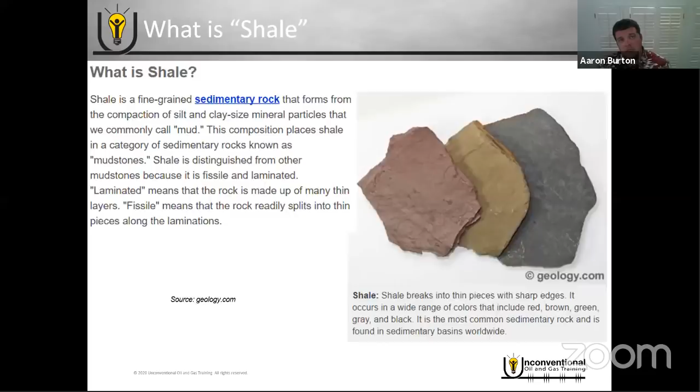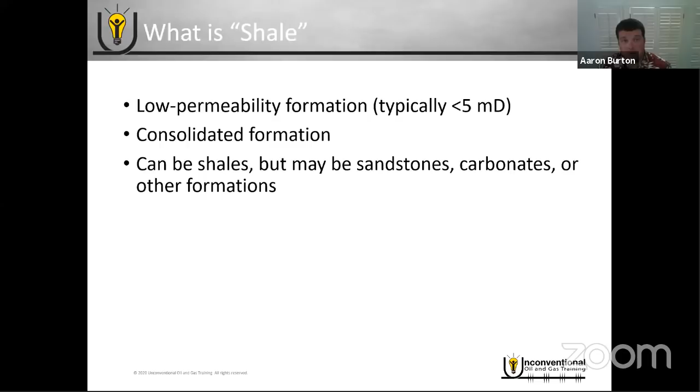But shale itself has become a slang terminology for these unconventional type plays. So with these unconventional type plays, what people are referring to when they say shale plays, they're talking about a low permeability formation that is typically less than 5 millidarcies if you're talking about oil, and typically less than 0.05 millidarcies if you're talking about natural gas. It's a consolidated formation, so it doesn't require any sand control. It's typically a relatively stable formation, and it can be shales, but it can also be sandstones, carbonates, dolomites, and any other type of rock as well. So it's just any type of rock that has that low permeability and can't produce on its own. At the end of the day, it's a reservoir that requires multi-stage hydraulic fracturing to produce at economical rates.

So the name of the game in these types of plays is to increase your reservoir contact area. The first way to do that is horizontal wells. So what we're looking at here, we've got our target reservoir, and it really depends on where you're at in the world as to how thick this reservoir may be.

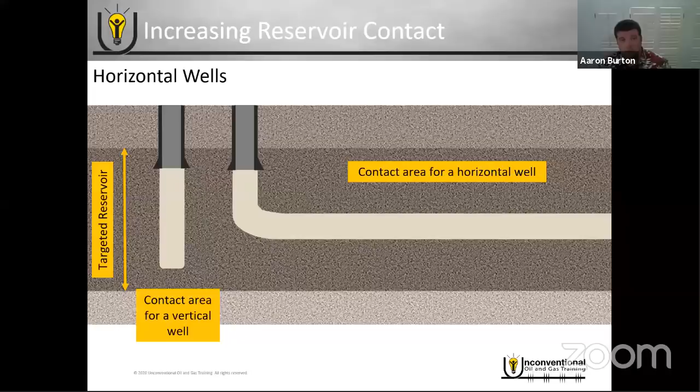If you're looking at the US and Canada specifically, typically you're not going to get much thicker than about 500 feet, and they can be as thin as about 50 feet. So let's just assume that 500 feet thickness. You can technically put a vertical well in there and get access to that 500 feet. But what if you put a horizontal well in there and then took it out 5 to 10,000 feet? Now you really significantly increase the contact area for that reservoir.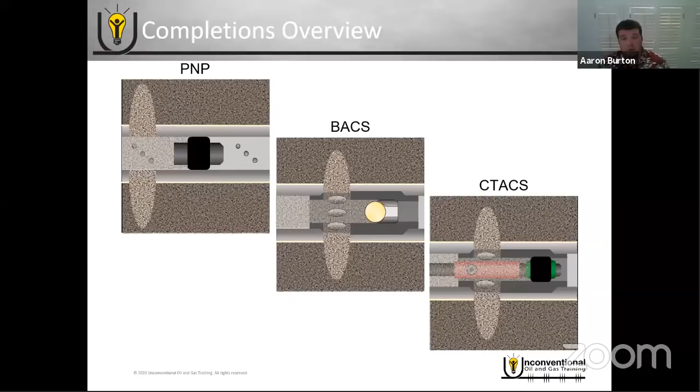Before we get too far into this, I want to familiarize you with some nomenclature, since I'll use this terminology frequently throughout the presentation. A horizontal well is just like looking at a foot. Right at the curve of the well, that's the heel. Then at the end of the well, at total drilling depth, that's the toe of the well. So just imagine a foot: the bend is the heel, the end is the toe.

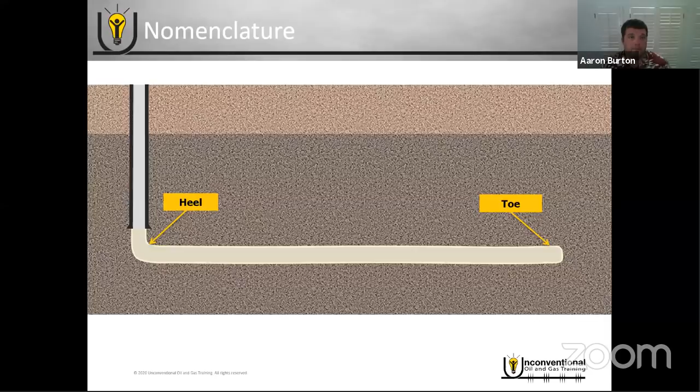So, plug and perf. Plug and perf is the original completion system that unlocked these types of reservoirs and is still the most commonly used today. We have our horizontal well drilled in our target reservoir. We use the drilling rig to run our casing into the well, and that casing is just steel pipe connected together and run as a string. Once you get to the intended depth, you pump cement through the casing into the annulus. Then once you're finished cementing, you do your pressure testing and move your drilling rig off location.

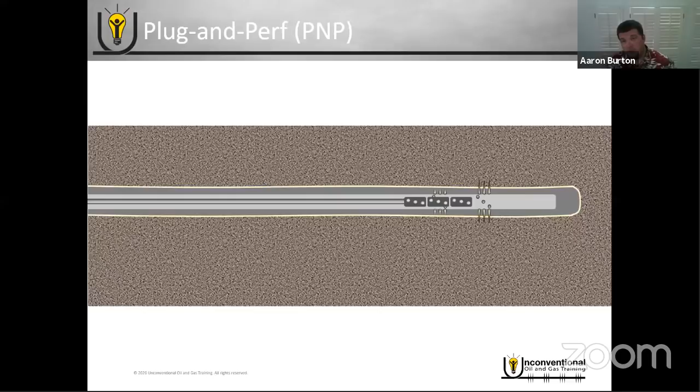Once you're ready to begin fracturing, you bring out your pressure pumping crew and your wireline crew. In this case, we've cemented ourselves into place, so because we have cement here at the toe of the well, we no longer have the ability to pump into this well. So we have through tubing intervention: we bring out a workover rig or a coil tubing rig, push down perforation guns, and fire them at the toe of the well. Those perforation guns penetrate through the casing and cement, and re-access the target reservoir. Once finished, we pull out of hole, and then begin fracturing our first stage.

Now, an alternative to this through tubing run is to replace those perforations with a cementable pressure-activated frac sleeve. You see these interventionless techniques being used more and more commonly, just to avoid that through tubing intervention run. You would run the sleeve, make it up directly to the casing with the drilling rig, run it into the well, and cement it into place with the casing. Then when you're ready to begin fracturing, you simply pressure up, and once you apply the right amount of pressure, the sleeve shifts open and you begin fracturing.

These sleeves are also commonly referred to as toe sleeves. So if you hear someone refer to a toe sleeve, that's what they're talking about.

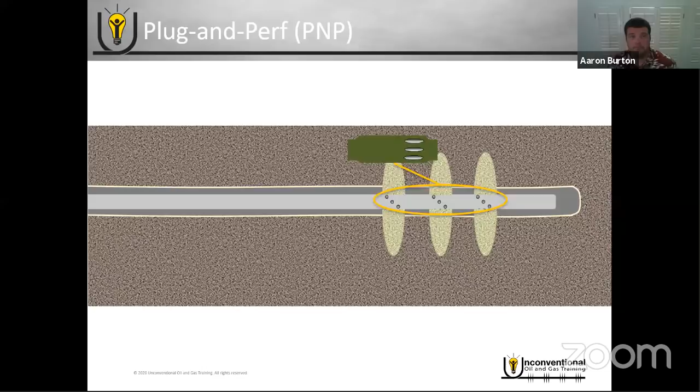Once we finish fracturing our first stage, most operators go to a wireline deployed system, because now you have the ability to pump through that previously fractured stage and pump down a wireline assembly. That wireline assembly will include, of course, wireline. At the toe of the assembly, you would have your frac plug. Above that, you have your setting tool, which will set the frac plug and then release from it. And above that, you have your perforating guns.

Once you get to the intended depth, an electric signal is sent down the wireline to set your frac plug. Once the frac plug is set, your setting tool releases, then you pull up the wellbore to the depth of your first perforation.

Once you reach that depth, another electric signal fires your first set of perforation guns. Then you pull up hole to the depth of your second perforation, and another electric signal fires your second set of perforation guns. Then you pull up hole to the depth of your third perforation, and another signal fires your third set of perforation guns.

Remember, this is important, especially for anyone taking the quiz: all of your wireline assembly tools are activated with electric charges through the wireline.

This technique is called cluster perforating. In this example, we had 3 individual guns and fired 3 individual clusters of perforations. So the nomenclature here is 3 clusters per stage in this well design.

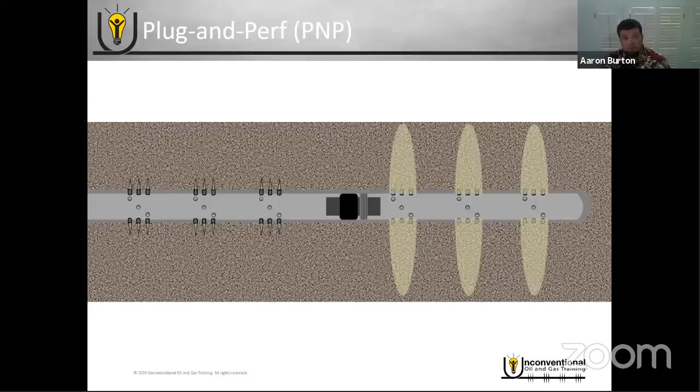Once we finish perforating, we pull out of hole with the wireline. Once we get back to surface, we set back up our frac crew and begin fracturing the second stage.

After that, the process repeats until you've fractured all stages in the well. You shut down your frac job, run in your wireline, set your frac plug to isolate from the second stage, perforate above that for your third stage, then pull out of hole with your wireline and begin fracturing your third stage. Then you run wireline again, set your plug, perforate, and fracture your fourth stage.

Pulling out of hole with wireline has always really been the weak spot of plug and perf, because that additional wireline run between stages is non-productive time for your frac crew.

Once you're finished fracturing all the stages in the well, if this is a traditional plug and perf using composite plugs, you have to enter the well again with coil tubing or a workover rig to mill out the plugs. Once the plugs are milled out, you can put the well on production.

This isn't as common, but it is used occasionally in certain applications: you can also do open hole plug and perf. What we looked at before used cement to isolate the annulus, but it's also possible to run open hole packers on the...

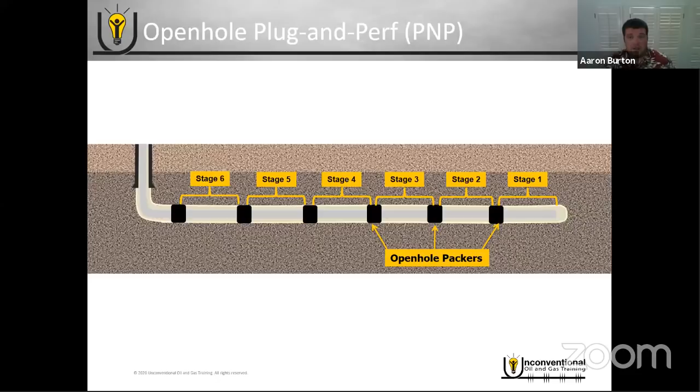It is possible to run open hole packers spaced out on the casing, and that'll be your annular isolation between each stage. Overall, the frac job looks the same, except now you have to be sure that you land your plug and your perforations between your open hole packers, because that's what determines your stage spacing and the overall length of your stage.

Again, it's not very common to set up plug and perf this way, but in certain applications, you can set it up this way if needed.

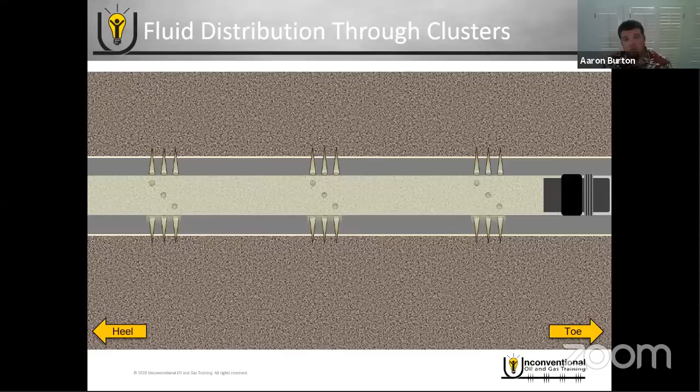Now let's look back at fracturing through the clusters. The basic theory of hydraulic fracturing assumes we get even distribution through the clusters. So if you're pumping 90 barrels a minute through 3 clusters, your frac design is 30 barrels a minute per cluster. The reality is we know we don't get even distribution through the clusters.

First and foremost, you have friction between the perforations to consider as well. Looking at it from that perspective, the path of least resistance is the heel-most perforation, and the path of most resistance is the toe-most perforation. So we're going to have more fluid distribution through the heel cluster than the toe cluster.

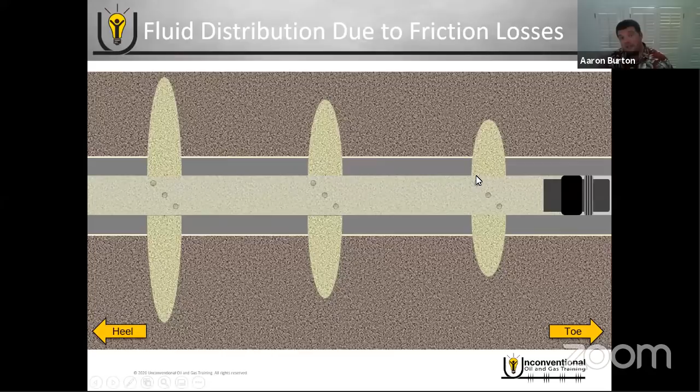That's where a technique called limited entry perforating comes into play. This is a very simple example—there are many different ways to do limited entry perforating, but this is an easy visual to help you understand the concept.

Now we've changed the flow diameter of each perforation: the toe-most perforation has 5 holes, the middle has 4, and the heel-most perforation has 3 holes. So from a flow area standpoint, the toe is easiest for the fluid to exit, and the heel-most perforation is the most difficult.

What you want to try to do is balance out the amount of energy, setting it up so each perforation cluster requires the same amount of energy for fluid to flow out. Hopefully, if you do your limited entry perforating correctly, you go back to that even fluid distribution throughout the clusters.

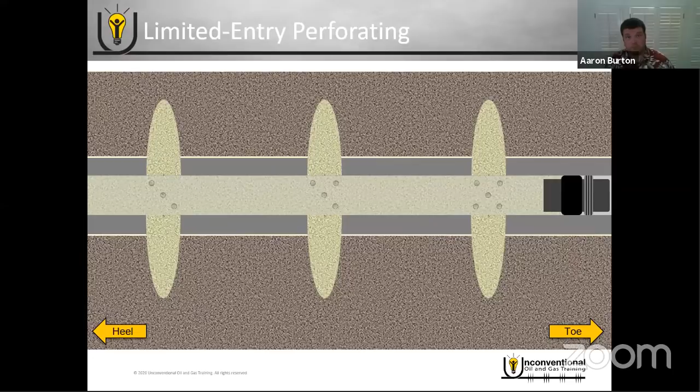If you're looking at friction as an example, that's something we have a little bit of control over, but we don't have control over the heterogeneity of these formations. So let's go to a 6 cluster per stage example here, and look at what happens when our fluid distribution looks something like this, just because of the different weak spots in the rock.

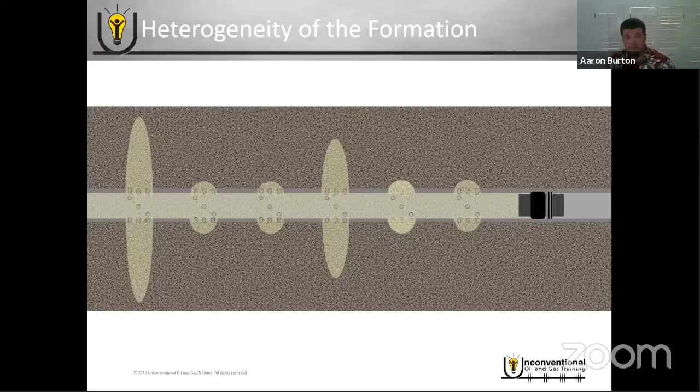That's where it gets a little bit tricky, and that's where something called diverters come into play. These are near wellbore diverters. If you go through a lot of US operator investor reports, a lot of times when operators talk about adding more clusters per stage, they often reference diverters as well.

So diverters, once again, are a little bit tricky. This is a very simplistic example just giving you the idea of what you're trying to do with diverters. The simplest way to visualize it is you assume all of your fluid flow goes out of one perforation. So you consider that single cluster of perforations an individual stage, and you pump as much fluid and proppant as you want out of that particular cluster.

Once you've pumped that, you pump enough diverter down to block off the near wellbore for that cluster, and it forces the fluid to divert into another set of perforations. You pump as much fluid and proppant as you want in that particular cluster, and then once you're finished, you pump another diverter to block off near wellbore there and force the fluid to divert to another cluster.

And then you just repeat that process. You would pump however much fluid and proppant volume per cluster that you want, followed by a diverter, until you've finished fracturing that stage.

Now, the diverters are a couple of different types of materials. Some of them you would have to go in with through tubing intervention to mill them out or circulate them out. And some of them are disintegrating material that will remove themselves from the well, and you can produce after your clean out run.

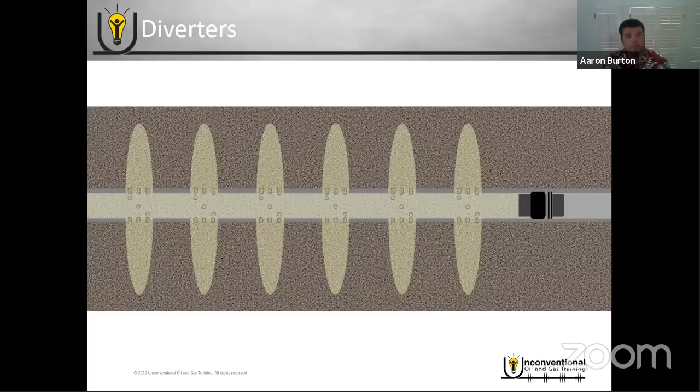But let's go back to this example here. Once again, we looked at a very simple example where we assumed all the fluid and proppant was going out of one cluster. But what happens in this case right here where that's not the case? So how do you possibly do a diverter strategy here?

So you pump enough diverter to block off one set of clusters. Well, now it's blocked off one dominant perforation, but there's another dominant perforation. So now does this perforation cluster become even more dominant? And then what happens if the diverter blocks off a non-dominant stage here? Now it's actually doing the opposite of what it's supposed to be doing.

You also have to be careful with your diverter design. If you pump too much, then you're blocking off all perforations, and you've created a situation where you've screened out, and now you're going to need through tubing intervention to recover this well and resume your frac job.

So diverters right now, we've learned a lot. We're making constant improvements, but overall they're as much an art as they are a science. This article right here from the SPE magazine, JPT, is a very good article outlining 5 case histories with a variety of different results with diverters. It gives you a good idea of some of the successes and some of the failures with diverters, and just how difficult they really are to get an effective diverter strategy.

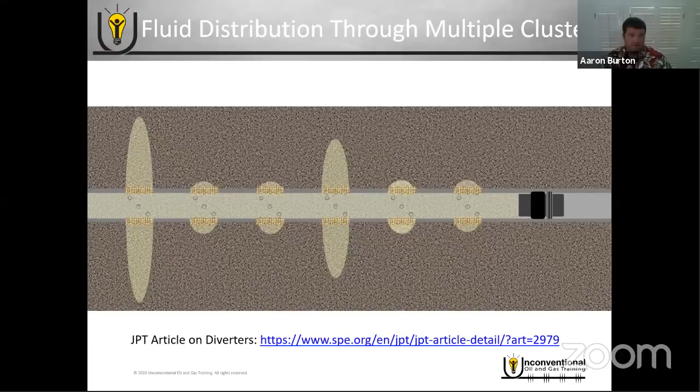Now, one of the things you're seeing with diverters right now is that operators are using them to eliminate a few stages from the wellbore. So what they can do, this image we're looking at here, this is 2 individual stages with 3 clusters per stage. They could take that same design and make it 6 clusters per stage, and they still have the same stage spacing, the same number of holes and flow area in that stage.

They may set it up to where they pump half of their frac fluid, assuming it goes out of half of the perforations, and then they pump enough diverter to block off half the perforations, and then they pump the remainder of their frac job.

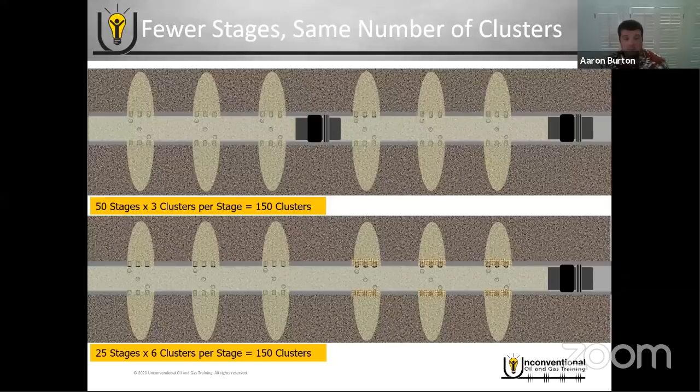Now if you look at these two setups, if you're wanting 150 clusters, 150 injection points, in the top scenario you could use 50 stages with 3 clusters per stage to get that 150. In the bottom one, you would have 25 stages with 6 clusters per stage and still have the same 150 spaced out the same way.

Now in the bottom scenario, you have half the plugs, so half the plug cost, half the plug deployment time, which is that wireline run between stages. So there can be significant savings in non-productive time, and you're also going to have savings on the mill out time as well because you have half the plugs to mill out.

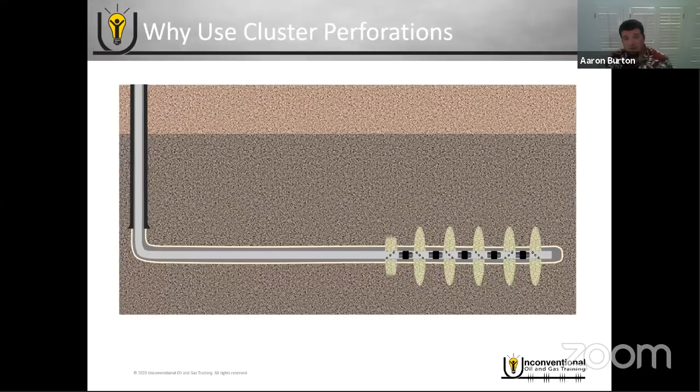So with the complications of cluster perforating, why do we use it in the first place? Technically we can do single entry plug and perf. You go in, fire a single set of perforations, fracture, set a plug, another single set of perforations and fracture, and just repeat that process, only fracturing one cluster per stage. But the reason we don't do this is because that would be extremely inefficient. So we do cluster perforating for efficiency purposes.

So this is an example from a prominent Permian operator, from their Q1 2016 operator investor report. In that report, they mentioned they were using 9,000 foot laterals, 100 feet per stage with 15-foot cluster spacing. Just a quick reminder on the nomenclature: the 100-foot stage spacing means there's 100 feet between each plug in the wellbore, and the 15-foot cluster spacing would be 15 feet between each perforation within that stage.

So what that data translates into: they were running 90 stages per well with 6 clusters per stage, for a total of 540 clusters of perforations in that well, 540 total injection points. If we assume 2 hours of downtime between stages to run our wireline, set our plug, perforate, and pull out of hole, then with 90 stages that's 7.5 days of downtime, assuming 24-hour crews. If we tried to break that into 540 stages, that would be 45 days of downtime alone. So it's extremely inefficient to break it into individual stages when you're looking at this many injection points.

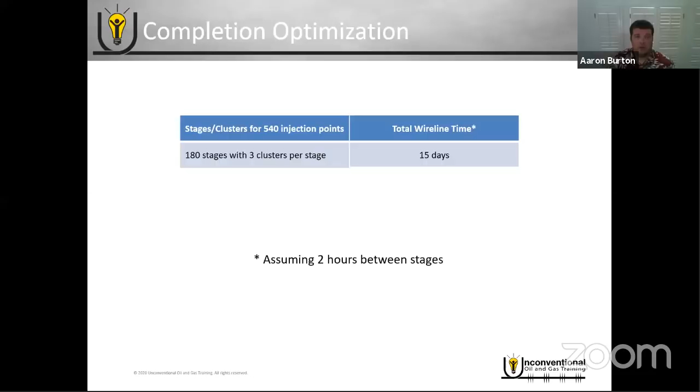So let's stick with that 540 injection point example. There are many ways to set it up. You could do 180 stages with 3 clusters per stage, and assuming 2 hours between stages, that'd be 15 days of wireline downtime on your pressure pumping crew. You could do 90 stages with 6 clusters per stage, that would be 7.5 days of downtime. Or you could do 45 stages with 12 clusters per stage, and that would be 3.75 days of downtime. So you're looking at a very significant amount of time and money savings by going with more clusters per stage. Not to mention, in the top scenario you have 180 plugs you have to run, 90 plugs in the middle scenario, and 45 in the bottom scenario. So as far as plug upfront costs, there can be significant savings there as well.

Now, everything we've talked about with the inefficiencies of wireline runs is talking about a one-off well. So what most operators have done, especially in the US and Canada, is go into pad drilling mode, allowing them to run simultaneous fracturing operations. They start pad drilling, drilling these wells really close together at surface, so the wellheads may only be 10, 15, maybe even 20 feet apart. That allows you to set up your wireline and pressure pumping close enough between the wellheads that you don't actually have to move them.

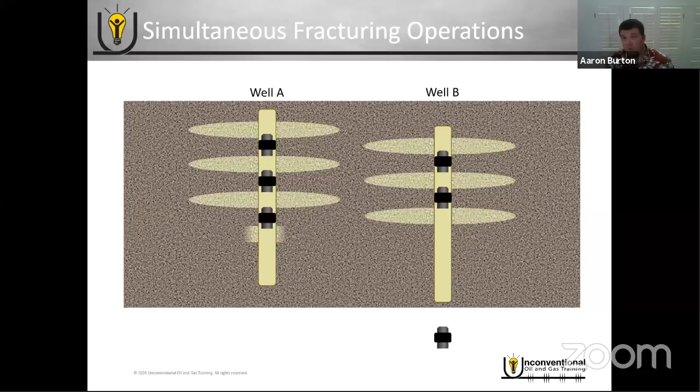You never have to actually move your frac crew or your wireline truck. You set up your frac crew with a manifold where it's simply turning a valve to control which fluid or which well the fluid is going into. And with your wireline, you set up your crane where it can swing between the two wellheads without ever being moved. This allows you to start eliminating downtime and be more efficient with plug and perf operations. It's called simultaneous fracturing operations, but it's also very commonly called zipper fracturing.

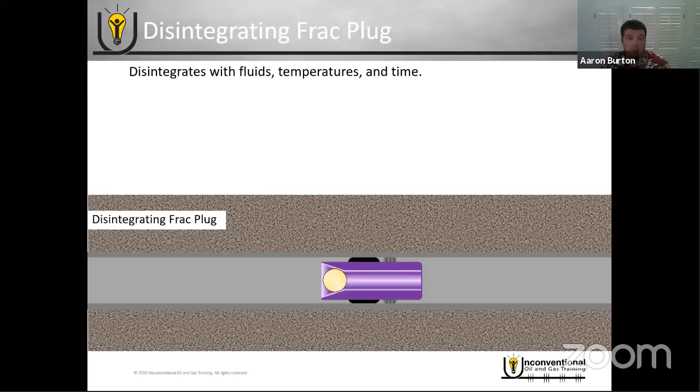One of the newer technologies with plug and perf is the disintegrating frac plug. The concept is that you don't have to have the mill out afterwards. You go in, it's just like a standard plug, the ball isolated plug. Once you set the plug, you pump the ball down hole, and that's what gives you your isolation. You fracture against the plug. Once you're finished fracturing, over time with the wellbore fluids, the ball and the plug will disintegrate and leave you with a full diameter. That helps eliminate the mill out afterwards. You don't have to go in with coil tubing or a workover rig. It makes it interventionless after the frac job, and it leaves you with a full production diameter.

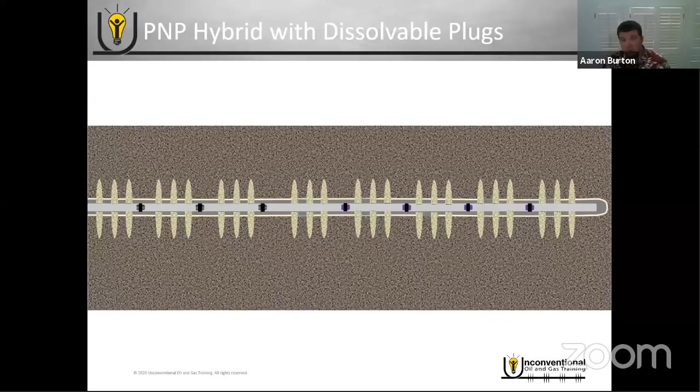There are a couple of different things to consider with dissolvable plugs, including price and application. Right now, you're not seeing a lot of full wellbores with dissolvable plugs, with the exception of a couple of examples like the Haynesville in the US. But what you are seeing is a hybrid system in some longer laterals, where they'll run the dissolvable plugs at the toe of the well and traditional composite plugs above that. That way they can have an interventionless system at the toe of the well, and their composite plugs within the operation range of coil tubing, with the interventionless dissolvable plug outside of that range. So they can go in, mill out the composite plugs with coil tubing, and over time the dissolvable plugs remove themselves from the well, and they don't have to worry about extending that coil tubing beyond the distance where they consider it safe to do so.

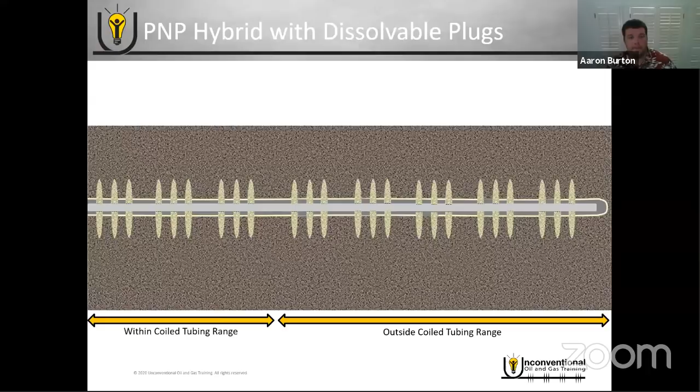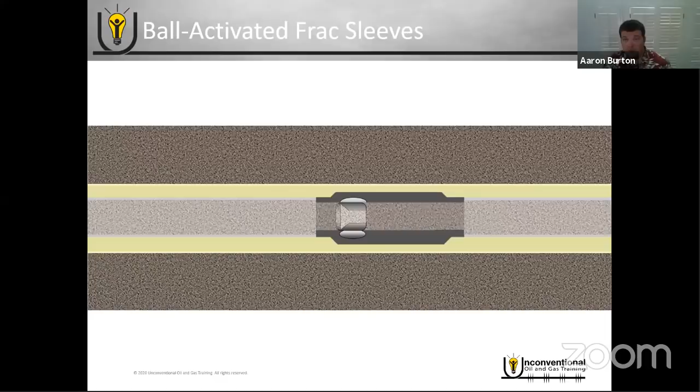If we zoom into the second sleeve, overall these sleeves are a very simple design, at least from a conceptual standpoint. You have ports on the outside of the sleeve, and if we look at the cutout on the inside, there's an insert covering those ports with a ball seat profile in it. As you're fracturing your first stage, you're pumping through all of the ball seats above that. As you finish fracturing your first stage, you pump a ball that corresponds to the second sleeve into the wellbore. It'll land on the seat, isolate from below, open those ports, and force the fluid to divert into the second stage.

Now if we move up hole of the third sleeve, as we finish fracturing our second stage, we drop the ball that corresponds to the third sleeve. It lands on the seat, shifts the sleeve open, and forces the fluid to divert out of the third sleeve. So it's a very efficient fracturing process because you're never actually having to shut down the frac job.

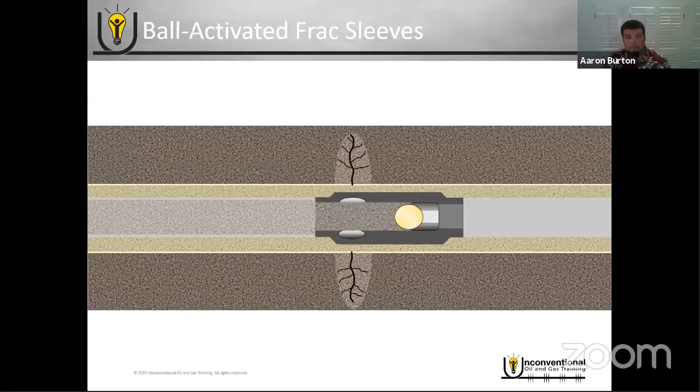It's a little difficult to tell in the animation, but the way you have selectivity with these balls and ball seats is the different sizes. Each size gets incrementally larger, so the smallest ball will be at the toe of the well and the largest ball will be at the heel. That way, the first stage can pass through all the sleeves above it and only open the sleeve that it's intended to.

After that, you're just repeating the process. You drop the ball that corresponds to the fourth sleeve, pump it down hole, it lands on the fourth sleeve, opens that sleeve, and begin fracturing. Then you pump the ball that corresponds to the fifth stage, and just repeat that process, dropping the balls in the correct order. That's really the highlight of this type of system—nonstop fracturing operations. You may have to slow down occasionally to drop the balls in the wellbore, but overall you're not having to run intervention between the stages. It's very efficient and very quick at surface.

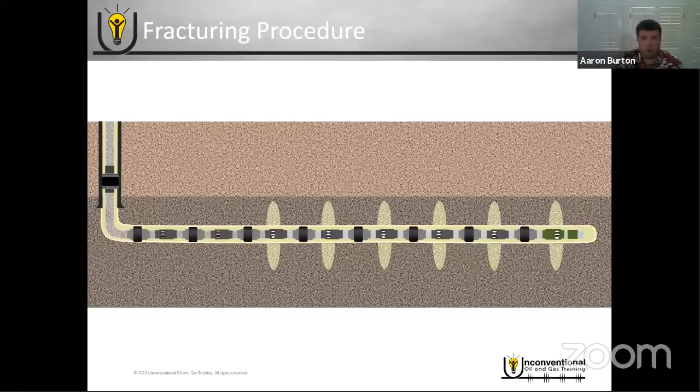If we look at the post-frac operations with this system, we're going to produce through the fractures we've created, back through the ports in those sleeves, and then production from below will push that ball off seat and back towards surface. In a lot of cases now, those are also dissolving balls. So instead of the balls having to return to surface to get out of the wellbore, they'll disintegrate within the wellbore fluids and remove themselves from the well without intervention. Now you can also see that there is a diameter restriction in the production because of those ball seats.

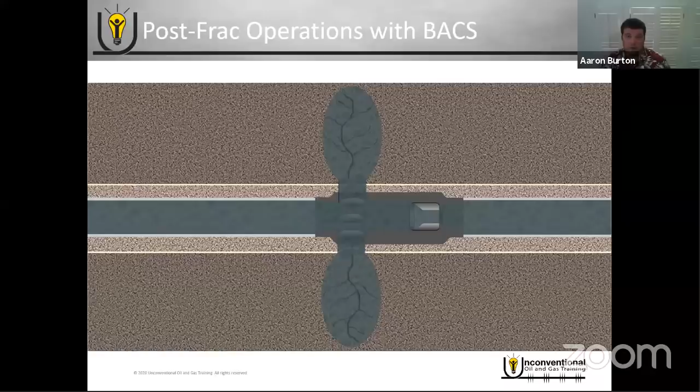These are designed, at least most of them, with cast iron. They're designed to be compact. So if that production diameter is an issue, then you can go in afterwards, mill out that ball seat, and get a near full wellbore production diameter.

Now, even though these were originally designed as open hole completions, they are also available as a cemented completion as well. So you can go in, the overall setup looks the same as far as the frac job. The only real difference with them is that instead of having packers between each sleeve for isolation, now you have that cement. Other than that, when you get to the fracturing process, you're just going to drop the balls in the correct order, and the frac job itself looks exactly the same.

There are also multi-entry ball activated frac sleeves. These are really designed to mimic plug and perf, to mimic that multi-cluster option with plug and perf. So very similar overall with the frac sleeve, with a couple of different nuances. First and foremost, we have adjustable frac ports, once again trying to look like plug and perf with the multiple clusters. In this case, you can blank out some of the ports if you don't want that much flow area, which allows you to do limited entry techniques. You can also change the size so you can have a larger or smaller diameter with those frac ports.

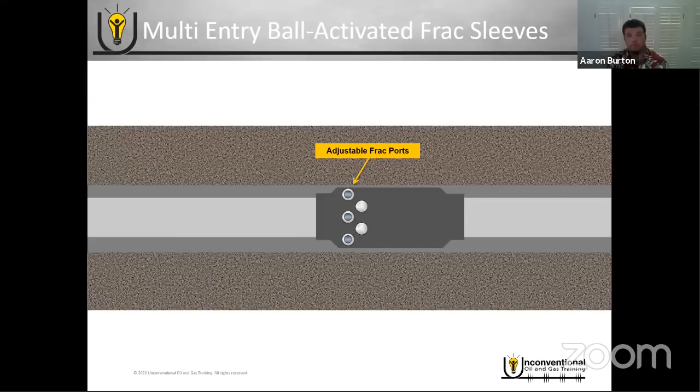Now, if we look at the cutout, once again, very similar. The only difference is now you've got that insert with the ball seat covering up the frac ports. When the sleeve shifts open, if it is one of the subsiding ball seats, then applying pressure shifts it down. That ball seat will subside out of the way, and the ball will continue moving down the wellbore so that it can open another sleeve in that same stage. We'll look at what I'm talking about here.

Once again, these are more used as a hybrid system in longer laterals with plug and perf. So you run your sleeves at the toe of the well, then you can drop the individual balls. The smallest ball at the toe will open all three of those sleeves at one time, and then you fracture through all three. Drop the next size ball, you fracture the next three, next size ball, fracture the next three. Now you can mimic plug and perf operations with frac sleeves, but you don't have to run wireline, and you also do not have to mill out afterwards. You can produce through those ball seats. Then once you get past that point, you do traditional plug and perf with composites.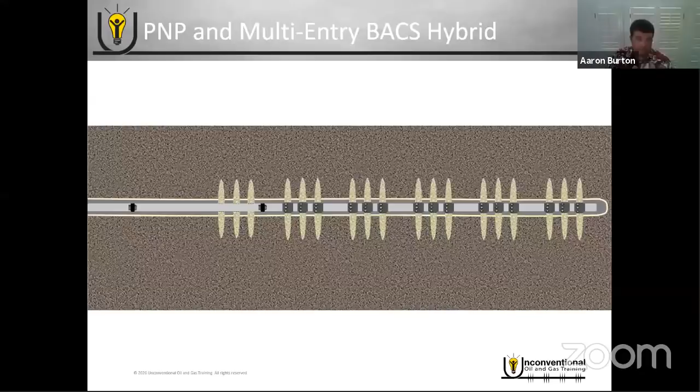Once you finish with the well, you would mill out your plugs and produce through your sleeves. It's the same concept as the hybrid we looked at before. You run plug and perf within the operating range of coil tubing, and the interventionless sleeves outside of the range of coil tubing.

So a couple of new technologies with these types of systems. We have the frac sleeves with counter mechanisms. With these sleeves, all of these ball seats are the same size, and you can see there's a counter. The toe sleeve is going to be sleeve 0. Once it passes through all the other sleeves until it gets to sleeve 0, you apply pressure, shift the sleeve open, and begin fracturing the first stage.

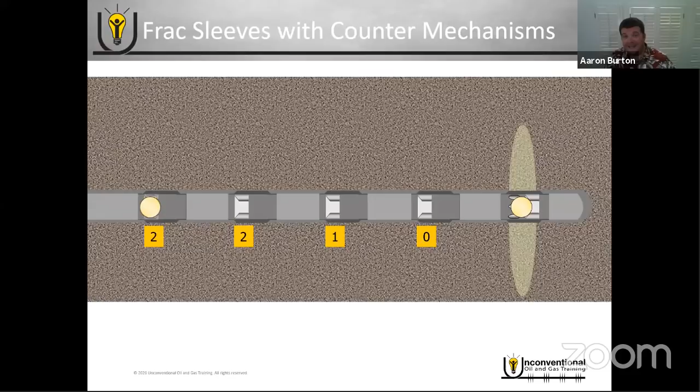Now you drop the exact same size ball again, pump it through all the seats, it'll count down, and now sleeve 0 is stage 2. It lands on sleeve 0, you apply pressure, shift that sleeve open, and begin fracturing your second stage. Then you drop the exact same size ball again, and now sleeve 0 is the third stage. With this type of concept, you're eliminating some of the diameter restrictions, and you have a virtually unlimited number of stages. There's a lot of different ways to count within these sleeves, everything from mechanical motion to electronics.

Another interesting new technology is a ball seat with a collet locator that you pump into the well. So now we have our frac sleeve. We're looking at the cutout view, and instead of a ball seat in the frac sleeve, we have an insert with a collet profile. You're going to actually drop the ball seat into the well, pump it in, and within the sleeve, you have the collet profile. On the ball seat, you have the collet, and the ball is already on seat, which allows you to pump down the wellbore without having wireline.

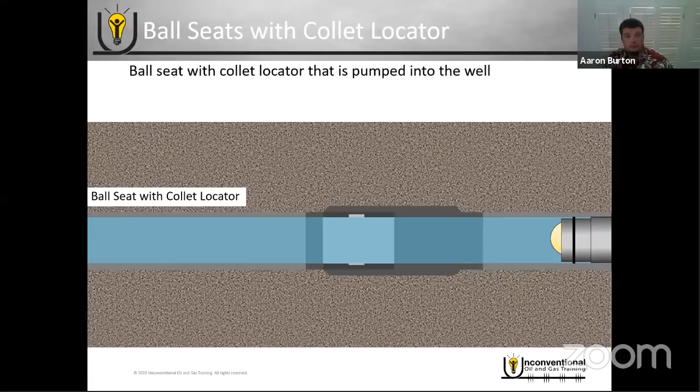You can see here the collet and the collet profile are not the right size, so they don't match up, and it continues pumping down the wellbore. As it continues going down the wellbore and gets to the sleeve with the right collet profile, that collet snaps into place. Now you have your ball seat in the sleeve, you apply pressure, and you can shift the sleeve open, just like the same functionality as the sleeves before. Now you can fracture through those ports, and once you're finished fracturing, this is a dissolving ball, so it removes itself from the wellbore.

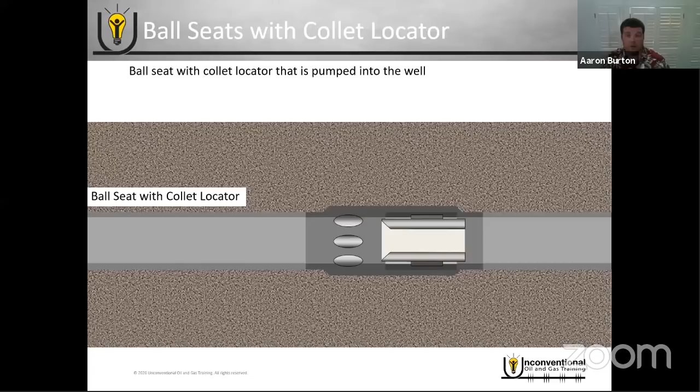Because you're using the same size ball over and over again, this is a very large diameter ball seat. So you can leave it in the wellbore and produce through it. Or if that is an issue, you can go in with coil tubing, run below it, grab it with your tool, and then pull it out of the wellbore. That'll get you back to a near full diameter.

The third type of completion system is the coil tubing activated completion system, and the most common way to set this up is the frac sleeves. We already have our horizontal well drilled, our completion system ran into the wellbore, and we're at the intended depth. Once we get there, we pump cement through the casing into the annulus, and that's what provides your annular isolation. These were really designed as a cemented completion with this system. Once you finish cementing, you pressure test, then you can move your drilling rig off location.

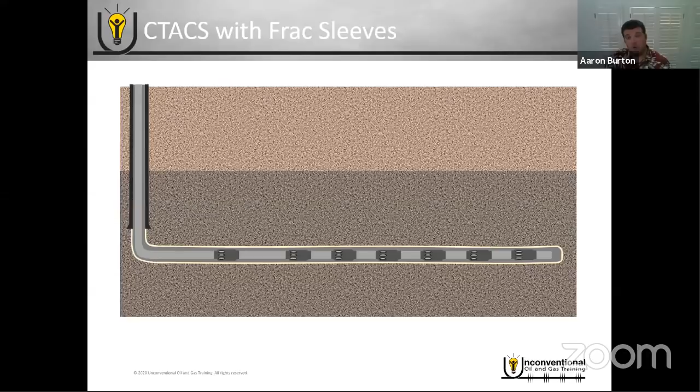Once you're ready to begin fracturing, bring out your frac crew and your coil tubing, run your coil tubing in the wellbore, locate your first sleeve, open your sleeve and begin fracturing that stage. Then pull up hole, locate your second sleeve, open that sleeve, and begin fracturing your second stage. Pull up hole, locate your third sleeve, open it, fracture your third stage, and repeat that process until all stages in the well are fractured.

Now, oftentimes you'll hear this referred to as annular fracturing. The reason is because you have coil tubing in the well while you're fracturing, and you're actually fracturing down the annulus between the coil tubing and the casing string.

So if we zoom back in to look at the operations a little bit more, like I said, you're fracturing down this annulus between the casing and the coil tubing. And when you're doing that, that's actually creating a collapsing force on the coil tubing, trying to collapse it.

So during the frac job, you're going to pump fluid through your coil tubing. In most cases, you're not really contributing to your frac here. But what you're doing is applying pressure back against the annular frac and preventing your coil tubing from collapsing. And what that allows you to do is get a dead leg pressure reading.

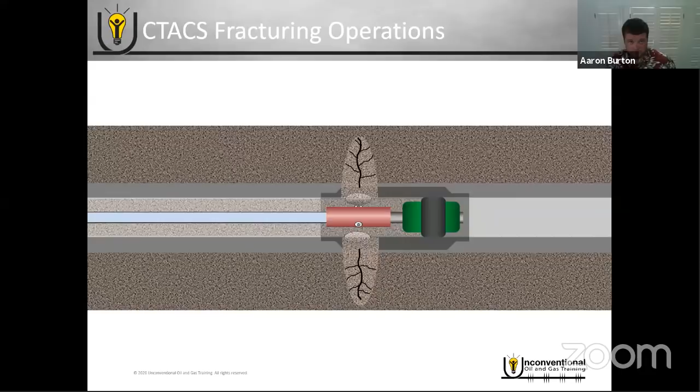So this gives you a lot of better contingency options. If you do screen out, you can help avoid it first and foremost, because the pressure reading you're getting through your coil tubing is a very low flow rate. It's laminar flow, it doesn't have a lot of friction loss, so the pressure you're getting through coil tubing is pretty close to the pressure you're actually getting at the injection point. On the annular side, you've got a lot of friction, turbulent flow, so the pressure you're reading at surface is not actually what you're seeing real time at the injection point.

So to prevent a screen out, you can watch this pressure through the coil tubing and back off the pressure or the proppant if you need to.

But if it's unavoidable, if you don't catch it in time and you have a screen out to the point where you actually leave sand in the casing, you have a built-in contingency option because you have coil tubing in the wellbore at the depth of the problem with the ability to circulate through the annulus and back to surface. So you can pump through your coil tubing out of that sand jet perforator or circulation sub, and then circulate that excess sand in the wellbore back to surface. Once you've done that, you can resume your frac job, in most cases moving on to the next stage so that you don't screen out again.

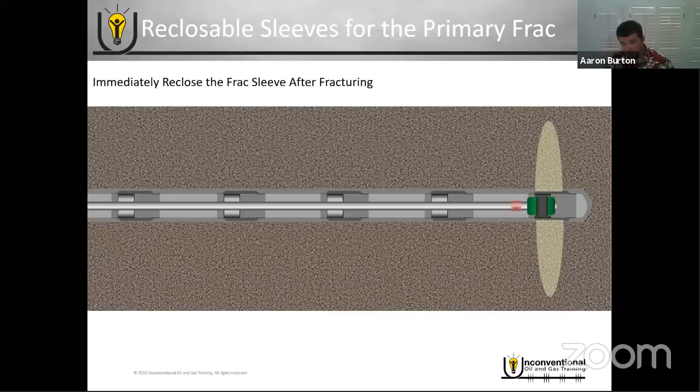So one of the newer technologies for this type of system is reclosable sleeves. One reason you might consider a reclosable sleeve is you can go in, fracture, and once you finish fracturing, you reclose the sleeve, then resume the fracs, repeating the process for every sleeve. Once you finish fracturing all the sleeves, you go back in, reopen them, and put the well in production.

Now this is going to be a very formation dependent application. What you're trying to do is prevent the loss of near wellbore proppant. So if your formation takes a little while to close and doesn't hold the proppant into place, the risk you run when you shut down your frac job and don't close the sleeve is that proppant just falls right back out of the fractures you've created, and you lose your near wellbore proppant, and your near wellbore conductivity is hurt as well.

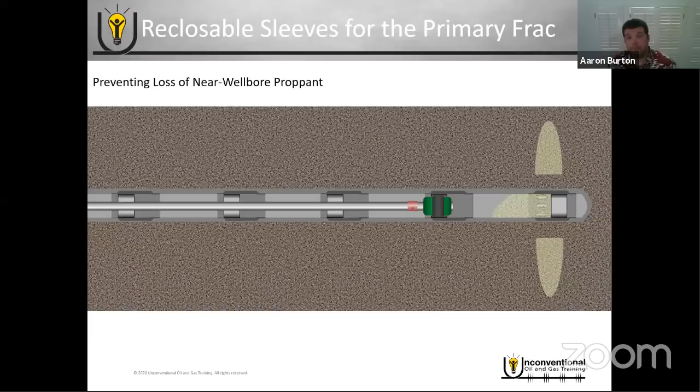So another option that's kind of interesting with this type of technology is out of order fracturing. Everything we've discussed up until now, we're always fracturing from toe to heel because you have to have isolation between each stage. You can't fracture at the heel and then go below it, because then you'll just pump right back out of the heel. But with a reclosing sleeve, we actually have the ability to do out of order fracturing.

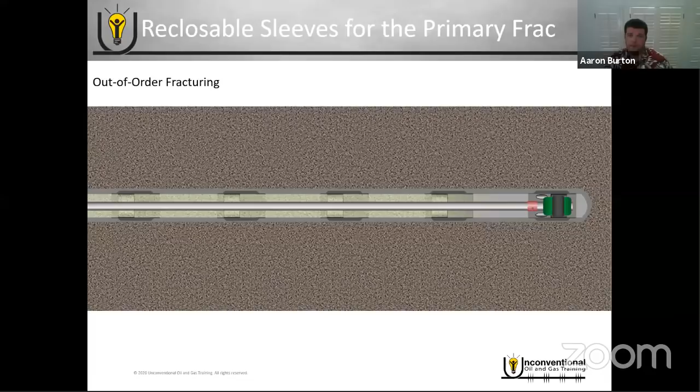So in this example, we'll go back to the toe stage to fracture our first stage. Once finished fracturing, pull the sleeve closed. Now we can go to our third sleeve to fracture our second stage. We open this sleeve, fracture our second stage, and once finished, we reclose it. Now because we've reclosed it and re-isolated it, we can go back down the wellbore and fracture our third stage through our second sleeve. So we go in, open the sleeve, fracture, and because that sleeve is closed, that's what makes this possible.

So the interesting thing to me is that this allows us to start playing with our frac jobs and trying to play on stress shadowing effects and things like that, hopefully increasing the complexity with our frac job and ultimately increasing the production.

The coil tubing systems were originally designed as a cemented system, but it's really easy to use as an open hole application as well. So instead of just isolating with cement, you just put open hole packers between each sleeve to give you that annular isolation.

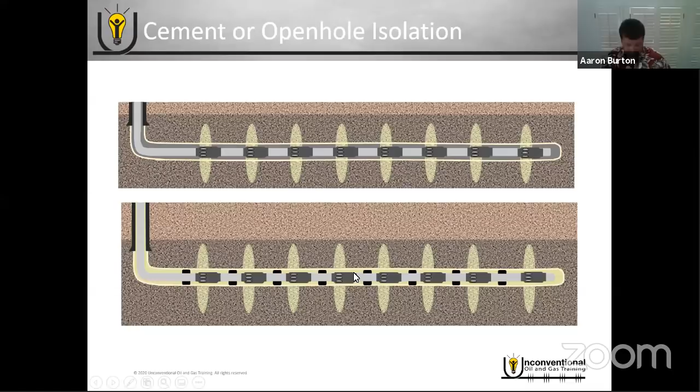That's the quick high-level overview of all the completions. At this point, we've discussed each completion system. Each of them provides effective multi-stage isolation. Each of them has hundreds of thousands of stages. They've been proven to give that effective isolation. Each of them requires different services. Each of them isolates with cement or open hole completion. So once again, pay attention to that point.

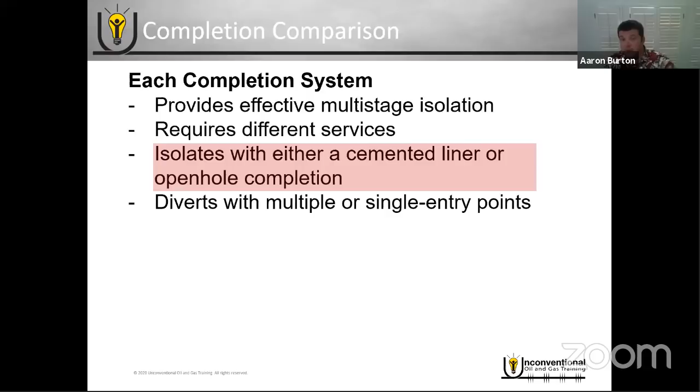You can do cemented plug and perf. You can also do open hole plug and perf. You can do cemented sleeves. You can do open hole sleeves. And each of them also, you can divert with multiple entry points or single entry points. You can do single entry plug and perf, or you could do multi-entry sleeves. So how do we choose the right completion system?

Let's start with just looking at the benefits and considerations, or at least a few of them. So let's go back to number of stages. With plug and perf, it's virtually unlimited number of stages. It's really dependent on the length of your coil tubing and the ability to remove and mill out composite plugs.

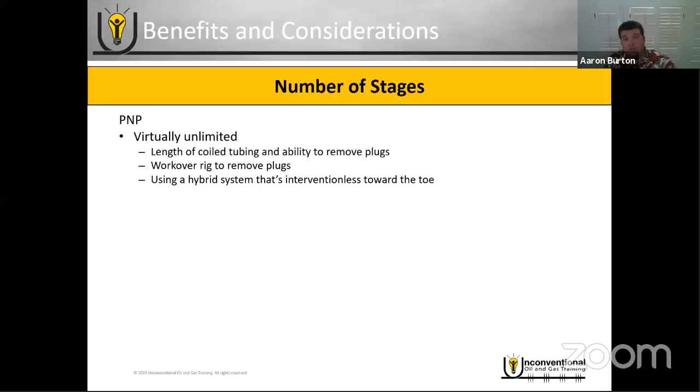You could also use a workover rig to remove plugs. That'll give you more distance to be able to mill them out. And you can also use the hybrid system that's interventionless towards the toe, using dissolvable plugs or cementable sleeves as well.

Then you have the ball activated completion system. It has a finite number of ball and ball seats in the original designs. Most of these systems are ran in 4.5-inch casing, so these are the numbers I'm going to use for 4.5-inch casing. Typically, if you're needing a 10,000 PSI rating, you can get about a 40-stage system out of these sleeves. If you can get away with less than 5,000 PSI, you can get up to a 65-stage system. And you also have less than 30 stages if the ball seat diameter is larger than 2 inch.

So if you want to restrict that no smaller than 2 inch diameter, so that you can get coil tubing in or that you can cement them into place, in a lot of cases you're going to be less than 30 stages. Now you also have the new sleeves we talked about, the counter sleeves and also the collets. Those offer a virtually unlimited number of stages with little to no diameter restrictions.

And then you have the coil tubing system. Once again, virtually unlimited number of stages. Your limitation is going to be the length of your coil tubing and the ability to function in the long laterals, because you still have to be able to locate the sleeves so that you can open them and function the coil tubing tools in general. You could also use a hybrid system that's interventionless towards the toe, using cemented ball drop sleeves to extend out the number of stages in longer laterals.

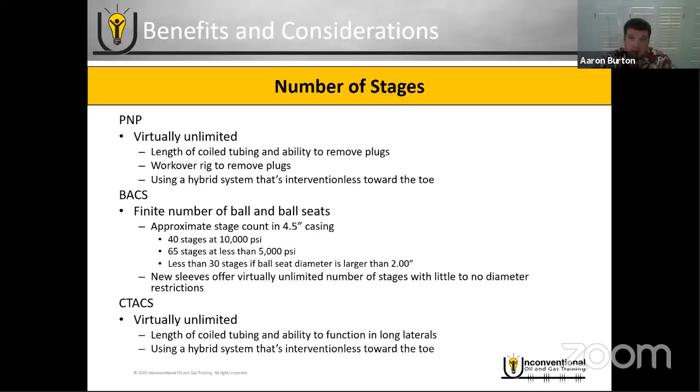Now let's talk about stage placement. With plug and perf, if you come across a situation where you have a fault in the well that you didn't really see, then all you have is a casing string in the well bore. So it's easy to pull up hole 200-300 feet, bypass that fault or geohazard you've come across, and then just skip over that segment of the well so that you don't have any issues while fracturing.

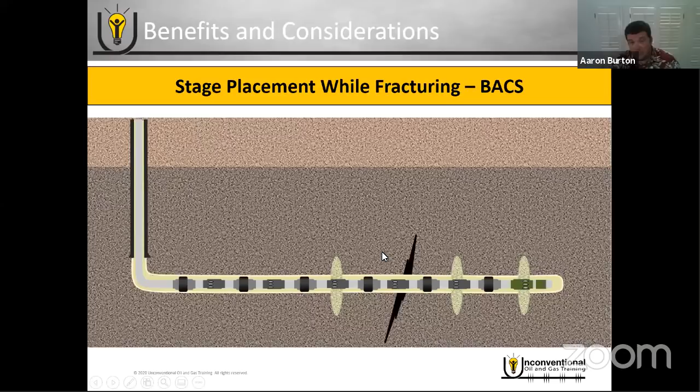Now with the ball activated system, because you have it fixed into place where the sleeves and packers are, then you can avoid it, but you're going to have to skip over a stage. So you drop the ball that corresponds with the sleeve above the fault, then you shift it open and fracture there and then finish it. So you're going to skip over this section. You still have the ability, but now you have to wonder, well, I wasted money with this sleeve and this packer. So I've taken some losses, but then again, it's better than wasting your money fracturing into a fault.

And then with the coil tubing sleeves, you've fixed them into place, you've cemented them into place. So you can skip over that sleeve, go over the fault to the next sleeve and skip over it that way. Once again, you've paid for a sleeve in the wellbore that you're not getting any money out of, but it's better than wasting your time fracturing into a fault.

Then we have design flexibility while fracturing. So once again, if you're taking the quiz, I highly recommend paying attention right here. With the design flexibility while fracturing, with a plug and perf well, it's a cemented casing system, so it gives you 100% complete flexibility on the design during the frac job. You can do whatever you want to in this well.

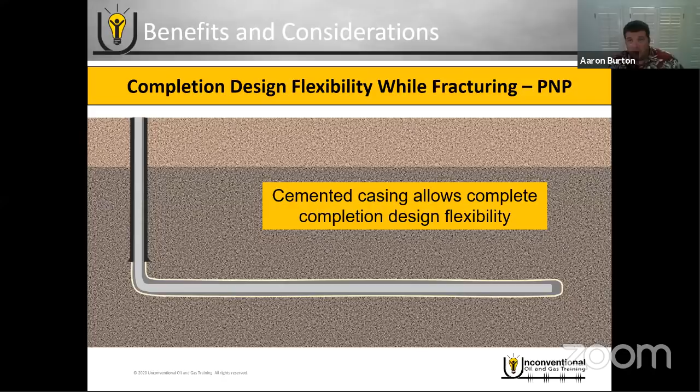And this has been one of the benefits throughout the years, because in a lot of cases they drill the well and they come back a year or two later to fracture it. So their completion strategy after a year or two years may be very different. So when they drilled the well, if this was their original completion design where they had 3 clusters per stage, but now they go to that 6 cluster per stage design, they can easily do that.

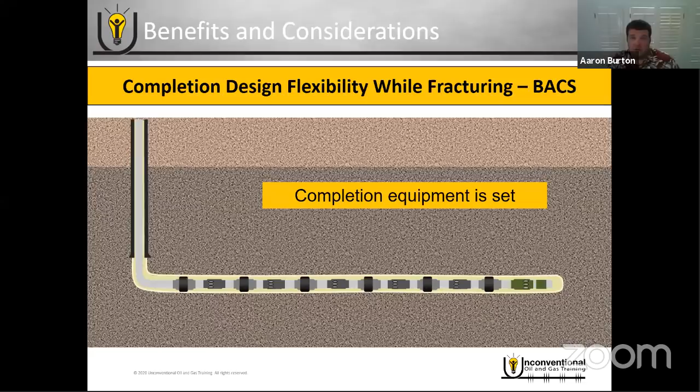They do it on the fly during the frac job and can adjust very, very easily. So the design flexibility with the ball activated completion system - once you've run the system in the wellbore and set your packers, the completion equipment is set. So that's how many stages you're going to have, that's your spacing on the stages. So there's not a lot to do. You don't have a lot of flexibility if you want to change your completion design. You're going to have to work with what's in the wellbore already.

And for the most part, the same with the coil tubing activated sleeves as well, because you've cemented them into place. That's your stage spacing, but you have at least a little bit of flexibility if you run in with a sand jet perforator. So what you can do is you can add stages between the sleeves if you use a sand jet perforator. Mostly fixed into place, but if you set up your coil tubing the right way, then you can add some stages on the fly.

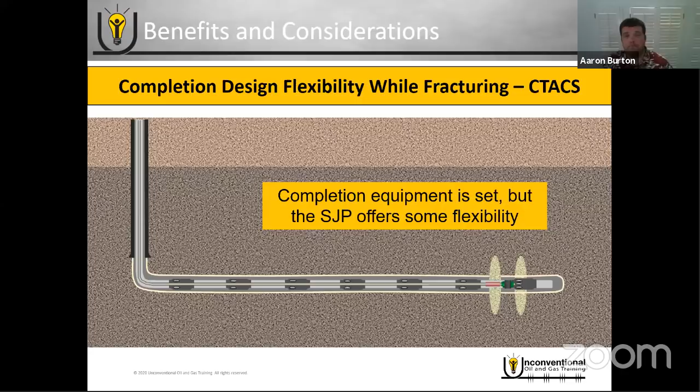So your contingency options with plug and perf - if you have a screen out during the frac job, then you have no diameter restrictions above you. So you can enter in with coil tubing, go in and do a clean out trip of that sand that you've left in the wellbore. And then once you're finished with the clean out trip, you can resume your frac job. So it really just depends on how quickly and readily available coil tubing is as to how long that will take.

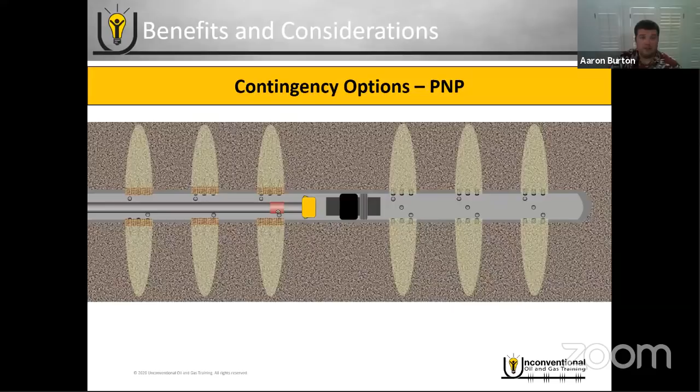With the ball activated completion system, if you screen out and you can no longer pump into the well, you can intervene with coil tubing. So you can go in with a profile on your coil tubing that looks like a ball. You can open the sleeve that you want to, or the lowest sleeve that you possibly can, and you can force that sleeve open and resume your frac job from there.

So in this case here, this isn't too bad because we screened out on one sleeve. We would have to skip over one, but we're only losing one stage, so it's probably worth it. The problem is, what if you have 30 stages below where you can open? Then you really have to look at it and say, well, am I willing to lose 30 stages? Now if that's the case and you don't want to lose 30 stages, which in most cases you probably wouldn't want to, then you can go in, mill out the ball seats, and do an open hole plug and perf. So it's not a complete loss of the well. It's very inefficient, as you can imagine, but it is possible to recover.

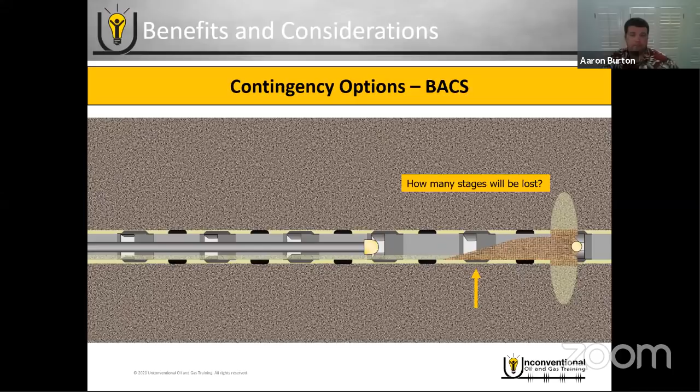And then like we talked about, hands down, it's the best with the coil tubing activated system, because you already have that built-in contingency with coil tubing in the well at the depth of the problem, with the ability to circulate through a sand jet perforator or a circulation sub. And you just circulate it out, you move your frac onto the next stage.

And operational efficiency. So from plug and perf, if you're using it, especially on a one-off well, it can be very tedious and time consuming, depending on how good your frac crews are and what depths you're dealing with. But you're going to have to stop in between stages. You have to shut down, run in your wireline, set a plug, perforate, and pull out of hole.

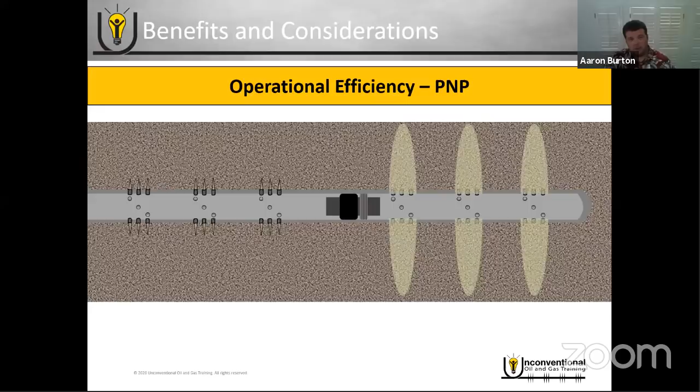In most cases, with a really good frac crew and wireline crew, that might be 2 hours, but I've heard nightmare stories of 8 to 10 hours per stage. So there's a lot of variables there. But remember, simultaneous fracturing operations, also known as zipper fracs, can help dramatically once operators go into pad drilling mode and have the option to set up wireline and coil tubing and rotate the services.

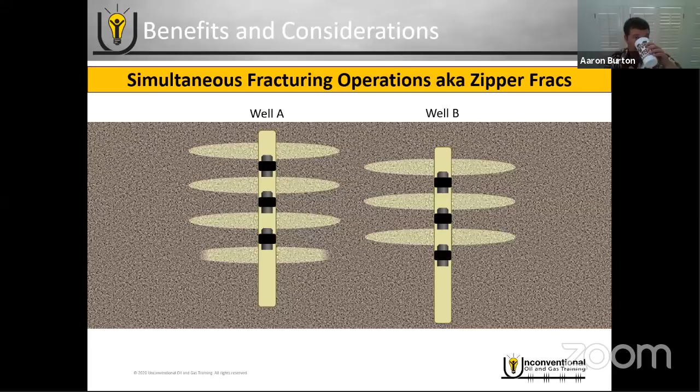This minimizes the non-productive time with wireline and with pressure pumping while running other services. They can also apply this on a large scale, bringing out multiple frac crews and multiple wireline crews. Some operators report they've gotten it down to such a process that there's virtually no downtime between stages, making plug and perf very, very efficient.

Now with the ball activated completion system, this is really one of the highlights because you're just dropping balls, opening sleeves, fracturing, and you never have to shut down that frac job. You just continue that nonstop fracturing process, so very, very efficient with surface efficiency.

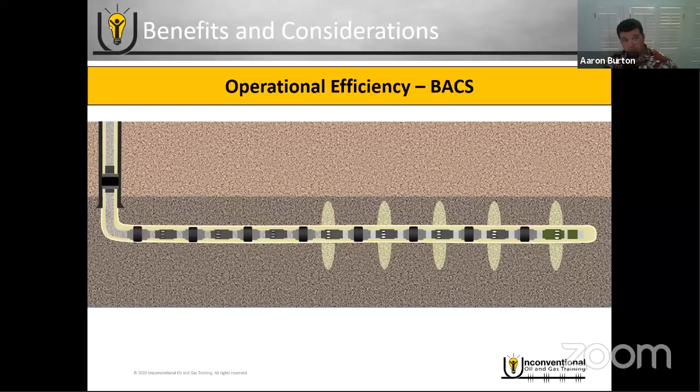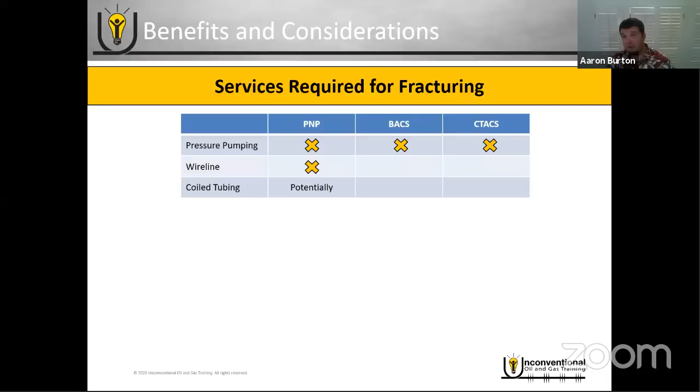You also have to consider services required for fracturing. Pressure pumping, all three systems have to have it, obviously. Wireline, you have to have it with plug and perf. Coil tubing, you may have to have it with plug and perf, depending on how that toe stage is set up, and if you have to do a tubing conveyed perforation run on the first stage. And you obviously have to have coil tubing there.

Now, there's additional considerations too. Are wireline units available? I know a lot of international people are attending right now, and that's where I've seen it. If you go to most U.S. markets, wireline units are pretty readily available, but I've been in a lot of, especially emerging markets, where the wireline units weren't available, or they had equipment shortages on certain things. One situation I saw in the past: are perforating guns accessible? In one country in North Africa, we were looking to do plug and perf, and we could not get perforation guns through customs, so that wasn't available.

Also, is the right size coil tubing available? Because it's going to be pretty tough to mill out plugs if you don't have the right size coil tubing, or if you can't get it to location. Another important thing: are the well sites accessible to coil tubing, especially in plays located in mountainous regions? Coil tubing units can be relatively bulky, so can you get that right size coil tubing up to the well site? The alternative is a workover rig, so is a workover rig available, and can it get to the well site?

You also have to consider what the costs of these services are. Sometimes the costs can be all over the board. I remember, it's probably been a decade ago now, comparing some costs: in Oklahoma it was $40,000 a day for a coil tubing unit, but in California it was $120,000 a day for a coil tubing unit. So all of those play a huge factor in economics and break-even cost on the well.

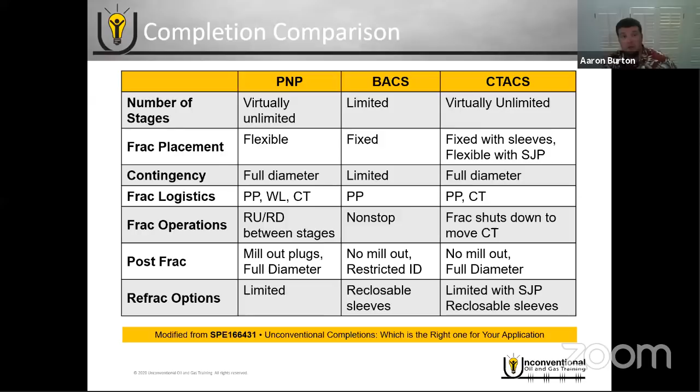So we'll start wrapping things up with a couple of quick examples of how to compare some of the systems. Let's assume we have a 40-stage frac job, 1 hour per stage in the frac plan, and no operational issues. If we use the ball activated completion system, that's 40 hours total time to stimulate, because you don't have to shut down your frac crew. That's 2 days with a 24-hour crew, 4 days with a 12-hour crew.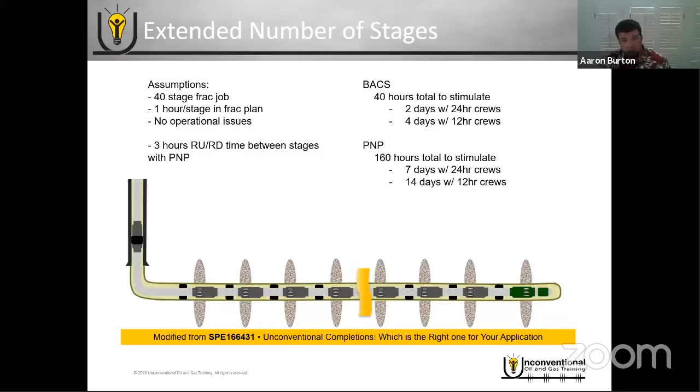Now if we did the same system with plug and perf, we have to make the additional assumption of the runtime of wireline to set the plug, perforate, and pull out of the hole. Let's assume it's 3 hours in this case. That would be 160 hours total time to stimulate, that's 7 days with a 24-hour crew, 14 days with a 12-hour crew. So in this case, your total savings with the ball activated sleeves means your frac cycle time is going from weeks down to days.

But let's look at a small number of stages - you still see this, though it's not as common anymore. You do see it in some emerging markets right now, but let's do a 5-stage job with the same assumptions. With the ball activated system, 5 hours total time to stimulate, 1 day with a 24-hour crew or a 12-hour crew. Plug and perf, with that same 3-hour assumption between stages, that's 20 hours total time to stimulate, 1 day with a 24-hour crew, 2 days with a 12-hour crew. So in this case, it's virtually the same.

You really have to look at the local economics and what's available and what the cost of those things are to be able to compare these two systems, because from a surface efficiency standpoint, there's not a lot of gain either way.

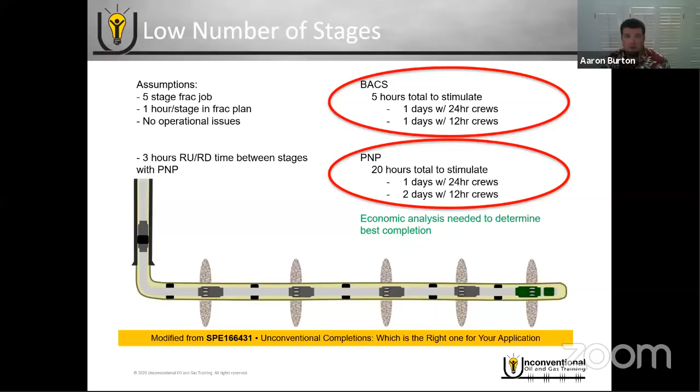If you follow completion trends in North America, in the US specifically, plug and perf is over 95% of the market. But I always caution people, because that really took hold when the downturn hit. Before the downturn, it's a tough number to keep track of, but going back to 2013 and into 2014, plug and perf was probably 60% of the market. It's all relative to the downturn and how it affected completion decisions.

So it's first important to understand how most US operators are structured. First, you have the drilling AFE, which is everything done with the drilling rig. You have the completions AFE, which is everything done between drilling and production. And then you have the production AFE, which is everything done after the completion. Now what's interesting is the drilling AFE - everything done on the drilling rig means you're constructing the wellbore on the drilling budget. So part of the downhole completion cost is actually on the drilling budget. If you're wanting to run frac sleeves, you're putting it on the drilling expense because it's run in with the drilling rig.

So we'll look at the US side in the Bakken. In 2014, before the downturn hit, the state of North Dakota gave operators 1 year between drilling the well and fracturing it and putting it on production. When the downturn hit, they extended that to 2 years, so operators could drill the well, hold it in place for 2 years before they had to fracture it and then put it on production. There were several prominent Bakken operators that publicly stated they would continue drilling to hold their acreage, but would not be fracturing and producing the wells until they saw oil prices they liked, or until the 2 years was up.

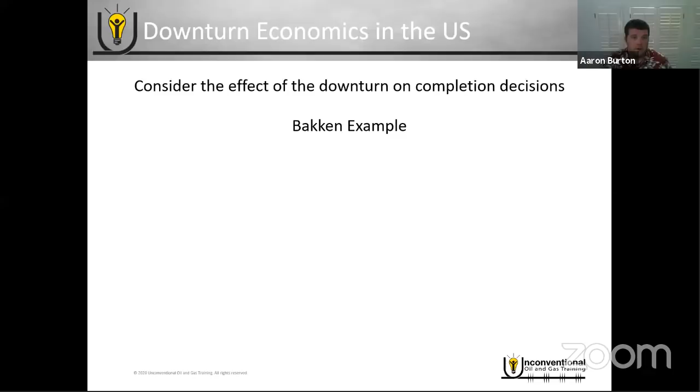So let's look at how that affects the overall drilling budget. We'll break down each of the completion costs first, and these are estimated numbers - it's going to vary obviously by your region, shipping, and all sorts of different things. But these are just example numbers you can use as a guideline for your example.

So casing - each completion requires virtually the same amount of casing, so you're not seeing any significant difference there. If you were going to cement the 10,000 foot lateral, that might be $50,000. If you were going to run, and we're doing a 50-stage system here, 50 ball activated frac sleeves, assuming $3,000 each, that's $150,000. If you ran 50 open hole packers and assume they were $3,000 each, that's also $150,000.

And if you used 50 coil tubing activated sleeves and assume that they're $3,000 each, that's $150,000.

So what does our wellbore construction cost look like for each system? A 50-stage plug and perf would be $50,000 because you need the cement in the wellbore. A 50-stage open hole, ball activated system would be $300,000 for the sleeves and the packers. A 50-stage coil tubing activated system would be $200,000 because you need the sleeves and the cement. A 50-stage open hole coil tubing would be $300,000 for the sleeves and the packers. And if you wanted to do a 50-stage open hole plug and perf, that would be $150,000 for the packer.

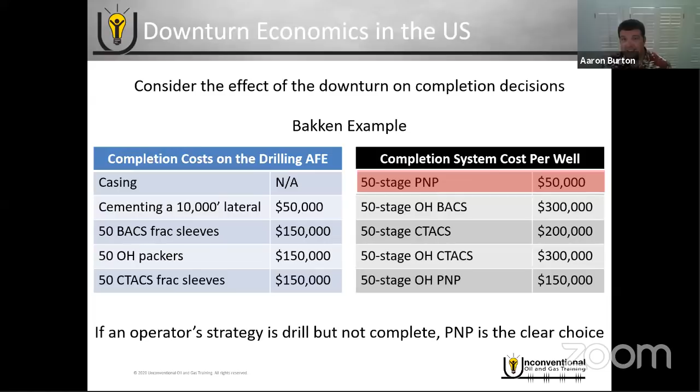So that's it for my presentation. Thank you, everyone. Like I said, I know this is a very quick overview.